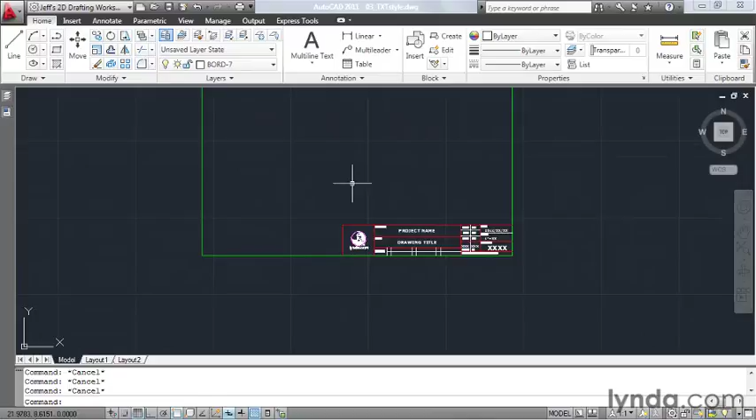On my screen, I have a drawing that represents a title block. Typically, when we think about title blocks, we think about text. I'm going to zoom in on the bottom of this drawing such that this text is a little bit easier to see, because I want to mention that the appearance of the text objects in this title block is being controlled by a couple different text styles.

For instance, I have created a style for this large title text, and I've created another style for the smaller text labels. Let's create a new style so we can see how the process works. To create a text style, I'm going to move up to the annotation panel, and I'll click this flyout. And right here I can see the name of the current text style.

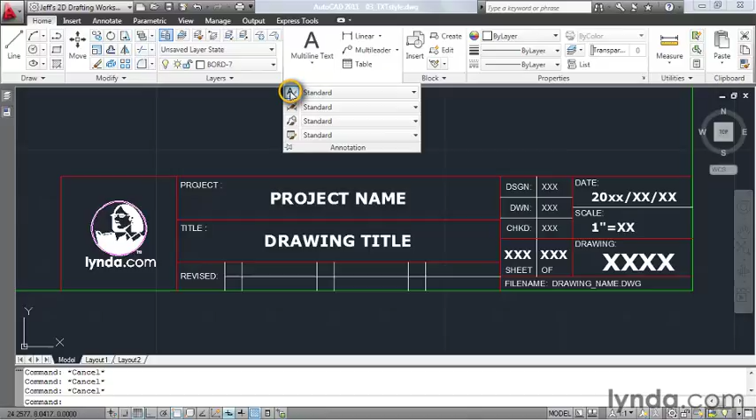Right now that's Standard. Now all AutoCAD drawings start with a Standard text style because you have to have at least one style in order to create text. To create a new style, I'll click the Text Style icon. This brings up a dialog box that I can use to build my new style. Notice that the current style is listed right here.

In this box on the left, I can see a listing of all of the text styles that are defined in this drawing. If I select a style from this list, I can see a preview of that style right down here. On the right side of the dialog box, there are some buttons that I can use to manage my styles. As you can see, I can set a style current, I can create a new text style, or I can delete an unused text style.

Now, I would like to create a new style, so I'll click the New button, and then I'll give my style a name. I'm going to call this General Notes. It's always a good idea to make the name of your style descriptive of what the text is used for. Let's click OK, and now that my style's been created, I can use these settings in the middle of the dialog box to control the appearance of this style.

I'm going to start by selecting a font. To do that, I'll click the Font Name flyout, and then I can click and hold on this slider, and I can drag up and down through the font list. And as I drag through here, notice that some of these fonts have a caliper next to the font name, and some of these have a TT icon next to the name.

The caliper represents that this font was installed with AutoCAD, and the TT stands for TrueType. This is a Windows font. Now, everybody's system is a little bit different, so you may see different font names in my list than you see in yours. I would like to select an AutoCAD font. I'm going to scroll down here to find Simplex, and I'll select that font from the menu.

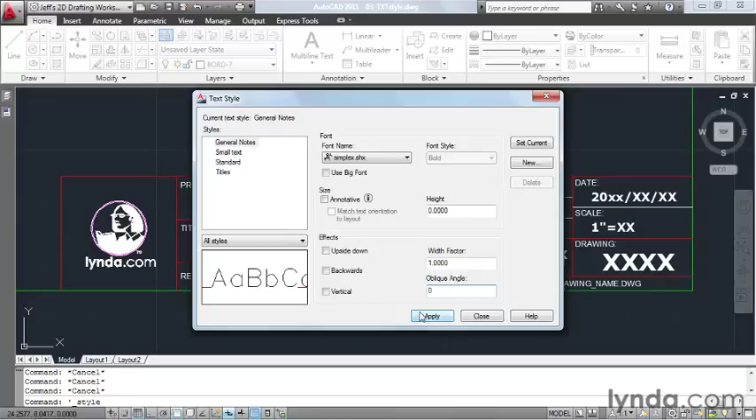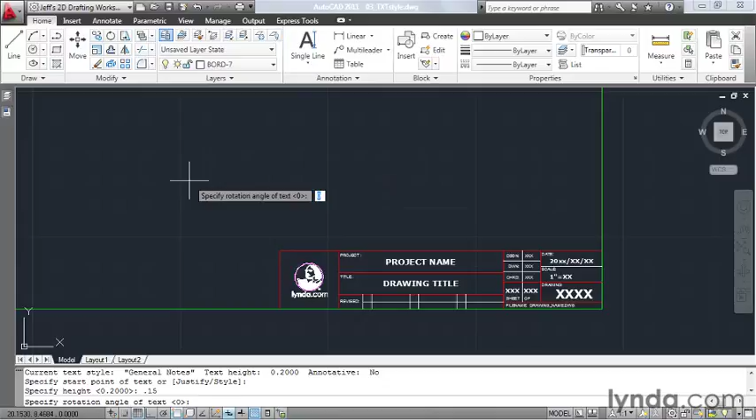Let's back up a little bit, and I would like to create a single-line text object. To do that, I'll click this flyout, and I'll select Single Line. I'd like to start my text right here, and I'm going to use a text height of 0.15, and I'll hit Enter. And then I'll hit Enter to accept the rotation angle of 0. This is what the General Notes style looks like. Enter, Enter. It's important to note that since the General Notes style is current, all text that I create from this point on is going to look like this.

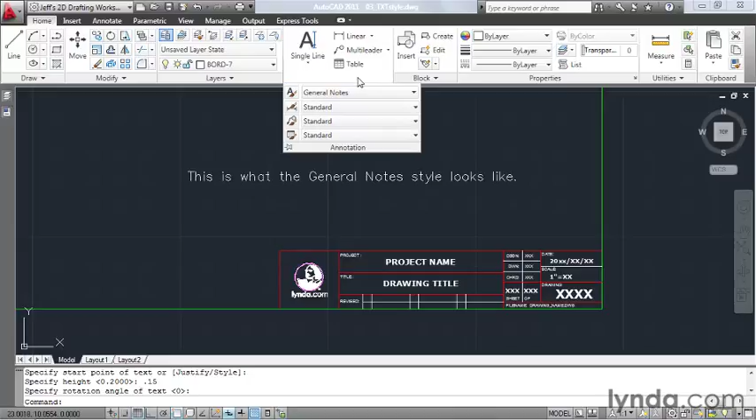Now, if I'd like to set a different text style current, I can do that by opening up the annotation panel, and then I'll click the text style flyout. And from here, I can select from any of the other text styles in this drawing. I'm going to set Titles current, and then I'll create another single-line text object. I'll start right here, and then I'll hit Enter to accept the default. This is what the Titles style looks like. Enter, Enter. Now, I created this style a little bit ago when I was working on this title block. This style is being used to control the appearance of these large titles.

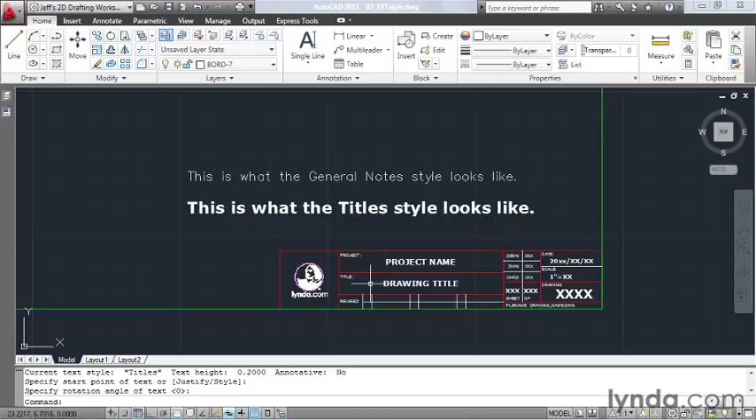Now, you may be wondering why text styles are important. Well, text styles give us more freedom over the appearance of our text objects. You see, if you modify the properties of a text style, all of the text that was created using that style will update. Let's try that. I'm going to open up the annotation panel. Then I'll come down and click the text style icon. Right now the Titles style is current. Let's assign a different font to this style.

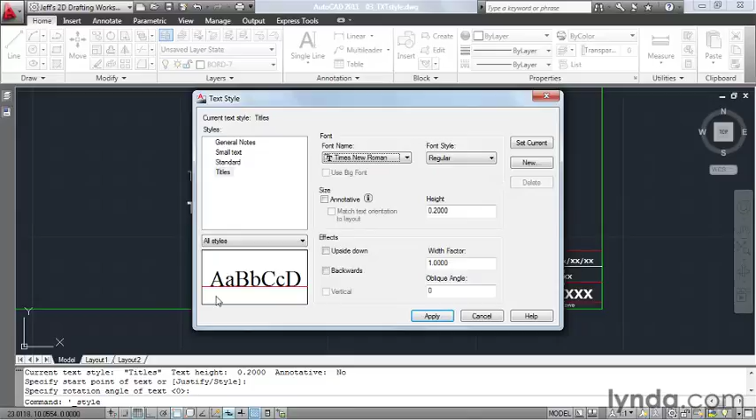To do that, I'll open up the flyout, and I would like to select a Times New Roman style. And instead of clicking and dragging through this slider, I'm just going to type the letter T. And notice that AutoCAD will take me alphabetically to that point in the list. We can see the new preview right down here. Let me drag this box up a little bit, and I'll click Apply and Close. And notice that all of the text that was created using the Titles style has updated on screen.

Now, if for some reason your text did not update, all you have to do is regen your drawing. Simply type RE and press Enter to update your text. Text styles control the appearance of all of the text in our drawing. As you can see, by making a simple modification to a style, we can automatically update all text that was created using that style.